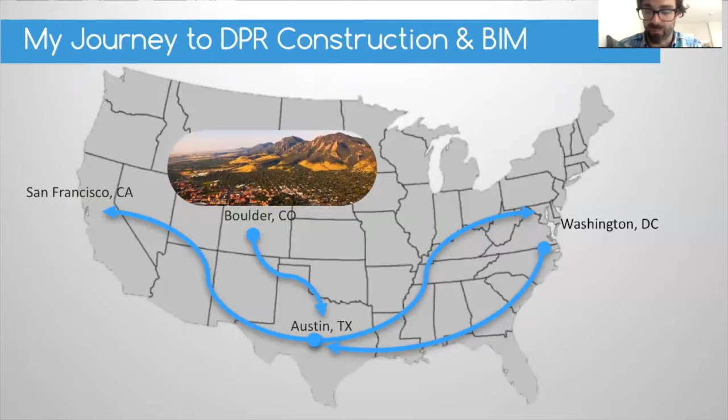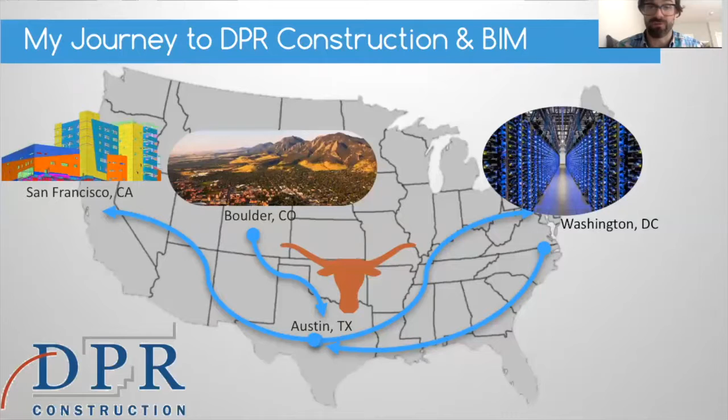I grew up in Boulder, Colorado, as you can see here, right up against the Rocky Mountains, very beautiful home, and went down to Austin, Texas, where the University of Texas is, and studied civil engineering, got my engineering bachelor's degree, and went to work for DPR first as an intern, doing data center construction in the Washington, D.C. area, and then eventually ended up full-time in San Francisco, California, working in BIM and project engineering and integrated project delivery for two different projects for Sutter Health that we're going to be talking about quite a bit today.

After that point, though, I was able to join DPR's innovation team and got some very interesting opportunity to spend time researching BIM in Abu Dhabi and in the Middle East and Qatar, and learned really from the other side of the world how contractors use BIM, sort of became a BIM trainee again, so to speak, and saw some interesting ways that they were using BIM for site logistics and quantity takeoffs and manpower tracking, and many ways that we were not using BIM in the US.

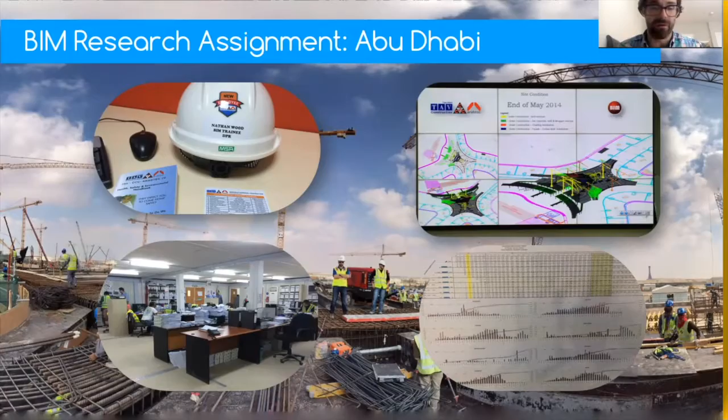But ultimately I also learned that while they were using a lot of BIM and there was a lot of really great data from BIM, there was a lot of paper, a lot of inefficiencies, and still a lot of room for improvement even out there as well. I took those experiences and was able to share those with another large contractor in Denmark through DPR's consulting group. It was very interesting to see how they approach Lean and collaboration and integrated BIM and 5D. And so I learned a lot from that experience, I think on both sides of the aisle.

And then last year, I left DPR and started Spectrum AEC, which is really intended to focus on understanding that choosing technology is just one aspect of really the innovation process, and that it starts first by understanding the needs of the people, the needs of the project team, how to define really good lean process through that, and then choosing the best fit technology. And that's really what brings me to the lesson and the story that I want to deliver to you about my BIM implementation journey. And really everybody's BIM implementation journey will be a little bit different.

I think it's very easy to start with, what is BIM? And in the US, I prefer the US National BIM Standard definition. You can see here from 2007. It says, a digital representation of physical and functional characteristics of a facility. A BIM is a shared knowledge resource for information about a facility, forming a reliable basis for decisions during its life cycle. So really emphasizing that it's a shared knowledge resource and that it should be a reliable basis for making decisions on the project.

Now, often we really want to jump into, okay, how do we do BIM? What are the 3D coordination steps? How do we do 4D scheduling? How do we do 5D cost estimating? How do we do 6D for facilities management, or the XD, which could be into energy modeling or other systems that are really pushing the limits of technology. But I think that's a lot of discussion that you'll see examples of.

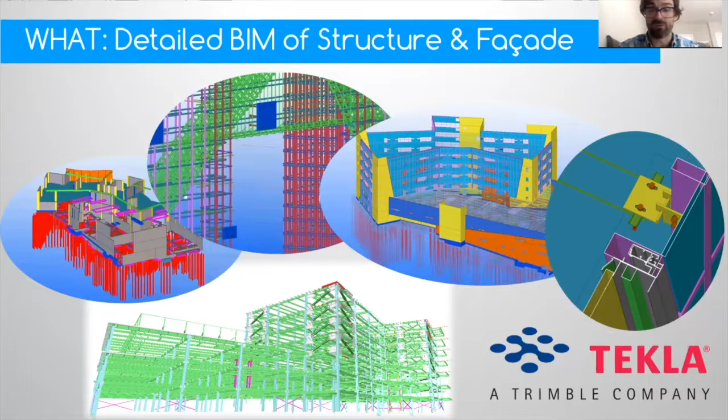And so very important, not only that these hospitals are very well built and stand up through earthquakes, but there is a very strict timeline of when they had to build that. And so what BIM was really focused on was based on those challenges of detailed structural coordination, understanding and using Tekla Structures, which is a BIM software originally developed for structural steel that now is developed around concrete works and rebar, and we were even using it for exterior skin extrusions and other facade works and some of those connections, as you can see here.

But really, how did they do it was a combination of BIM and Lean and integrated project delivery. You can see below here is the 11 different parties of the integrated form of agreement that Sutter Health signed to really bring all of the shared risk and shared reward together. And some of the goals and the key performance indicators that they had set out that was very important to their success was that they had set a need and a goal of 30% reduction in the design and construction schedule. They planned on using BIM and Lean as a way to really drive that 30% reduction.

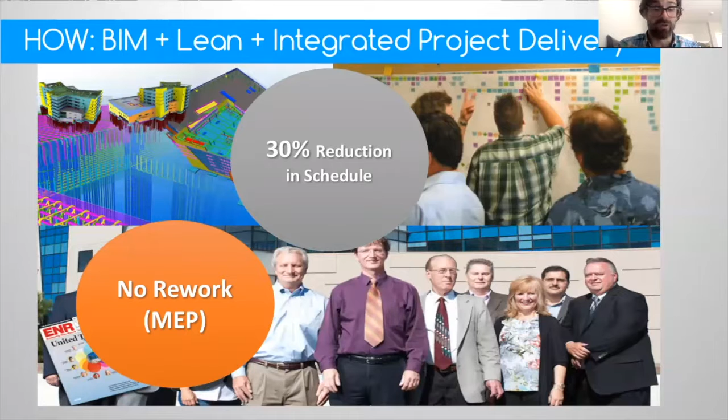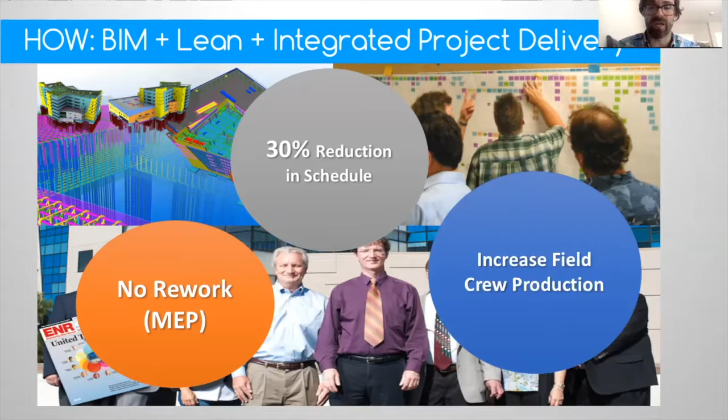They didn't want to see any rework. That was a really key part of it. And in order to not have rework in the field, that meant that we had to track the rework. And as we have less rework, I think the intent is that we should have increased field crew productivity, and we should be looking for innovations through prefabrication and modularization to increase that field crew productivity.

And really, ultimately, the vision, and you can see below, this was actually an IGLC paper in 2014 that was written by Digby Christian of Sutter Health around this 4-phase integrated project delivery that goes through the value definition, the representation, the realization, and the value capture. And BIM is really a great enabler of that, of starting with the visual representation and the needs, moving into a really coordinated, detailed BIM that is at that point of release in order to realize that BIM and capture a really well-produced facility in less time.

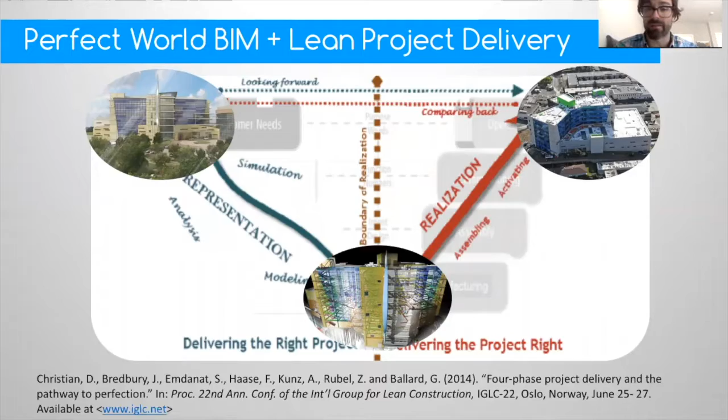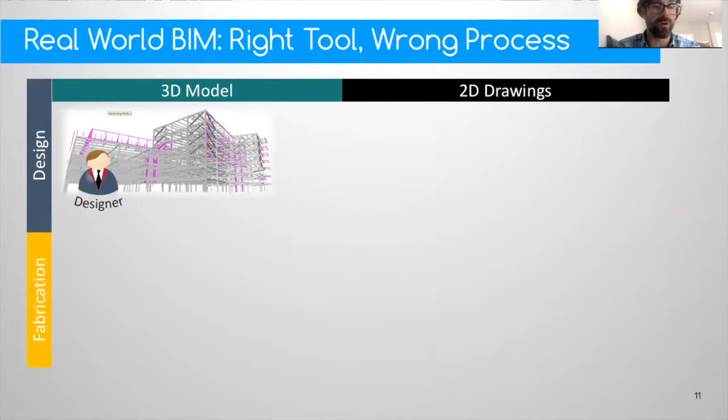But I think in reality, and what we have seen very much on a lot of these projects, and Castro Valley was included in this, is that the real world process is much more of a 3D to 2D process, and that design engineers will typically create a Revit BIM that produces a 2D set of permitted drawings for the city to review. And then the detailer will often take those and create their own separate set of shop drawings from there, in which case the designer will come in, review those drawings, and then those shop drawings are what end up going off to the contractor.

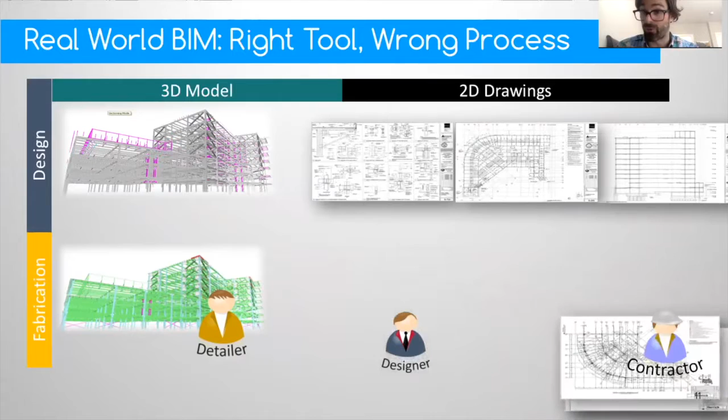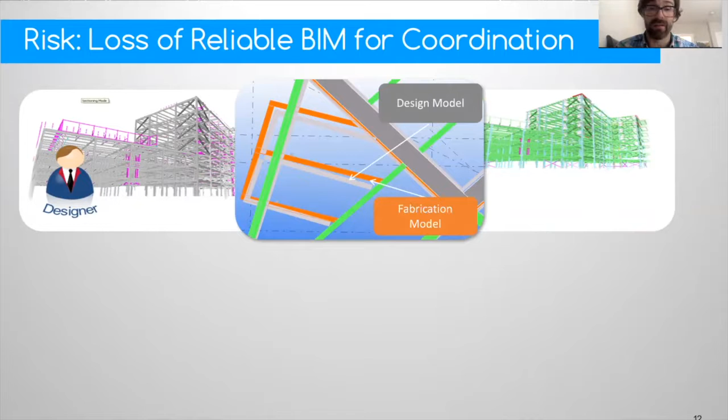So very often the question and the risk when it comes to this level of detailed BIM and wanting to not have any MEP rework or any rework was, can we be confident that the model that's created from the designer is the same as the 3D model created from the detailer? And sure enough, as we did some of those overlays and investigations, we found out that they were not aligned and that there needed to be some reconciliation between those two designs, that there was not a reliable transfer of information.

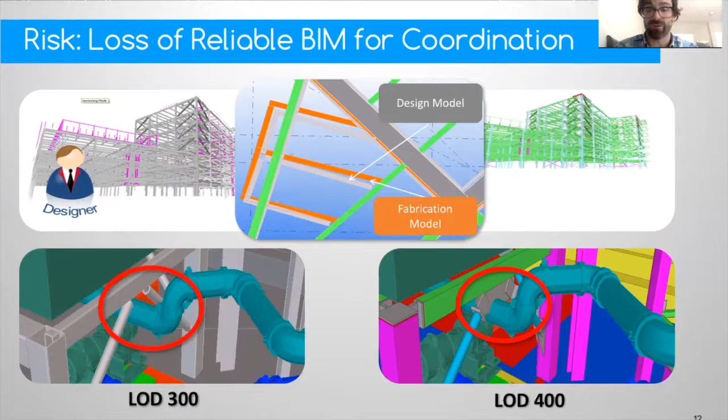You can also see that this also impacts downstream when we're dealing with amount of information, amount of detail within a level of development that is 300 versus a level of development that is 400. Seeing there that could be a very expensive $30,000 clash in the field that we want to definitely make sure that we identify ahead of time and capture that value within BIM coordination.

So one of the really great direct BIM uses is the direct transfer of 3D coordinated shop drawings or 3D coordinated models to those 2D shop drawing outputs, doing that with both rebar works and some very complex and dense rebar coordination, as well as the coordination of all of the embeds and penetrations that were required for the exterior skin system on the project.

Now, it was actually during this process of coordinating these two that we came across a clash in the model between the penetrations that were required for the precast facade system and the concrete core walls. So you can see here where the 4 or 5 different red dots there were penetrations that needed to be moved. Other areas where embeds within the concrete deck were conflicting with structural steel elements.

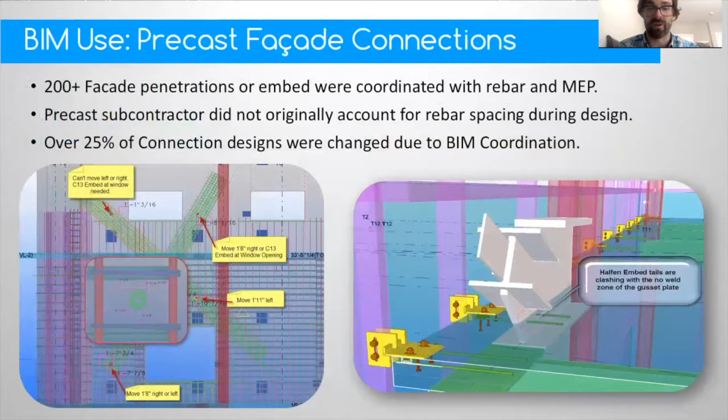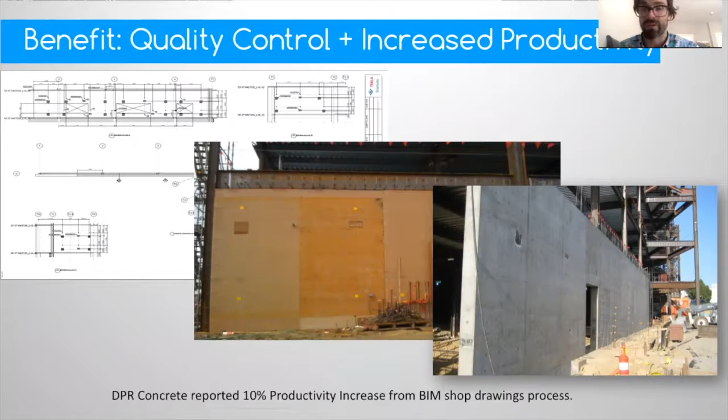So overall we found at least 50 or 60 different elements that needed to have a structural redesign and a new approval gone through OSHPD. And it was very fortunate for us to identify these ahead of time to be able to really avoid and mitigate that risk. And so you can see here, we not only gained the mitigation of the risk, but really an efficiency of direct transfer from BIM to 2D drawings to field layout, and high quality. I believe DPR Concrete reported a 10% productivity increase through this BIM to field layout process.

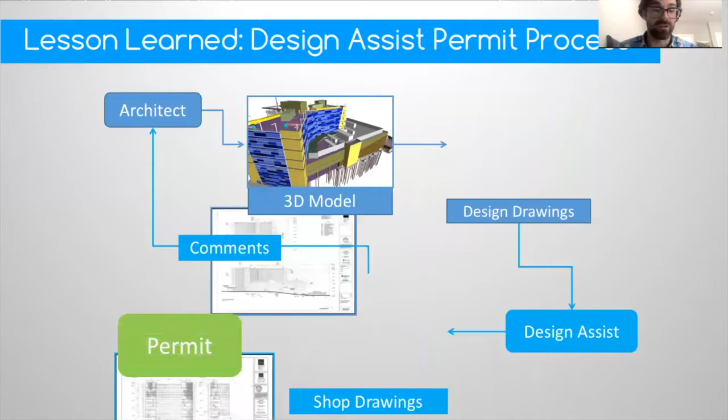So one of the lessons learned as we continue to research how the model information gets from design to construction: when it came to the facade itself, we looked at where the architect was creating their 3D model that would create 2D drawings and pass along to a design assist subcontractor that was creating the fabrication drawings. And they would create shop drawings, and we go through a comment process in the design assist process. And ultimately, we would actually have two different sets of drawings that would go in for permit to the city.

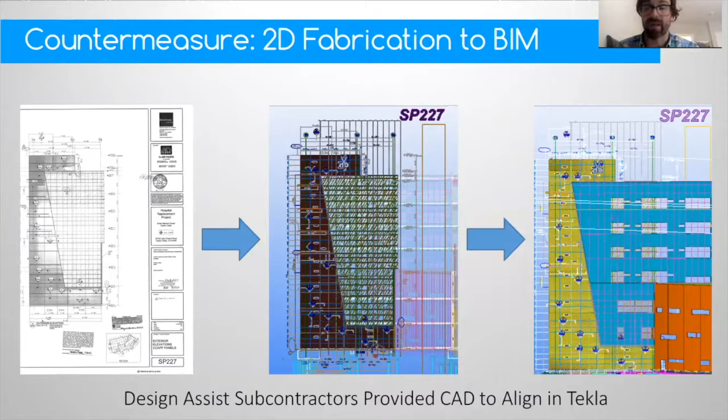Now, once again, we run into the question of, is there a reliable handoff of information in this very manual collaborative process? And what we did was we took those same shop drawings from the fabrication, moved them back into BIM, asked for the CAD drawings, aligned the CAD drawings within BIM, and then within Tekla, you can see here, we took 50 or 60 different 2D CAD elevations, aligned them appropriately on the grid lines, and virtually traced the as-built or as-will-be fabricated model of the different skin systems.

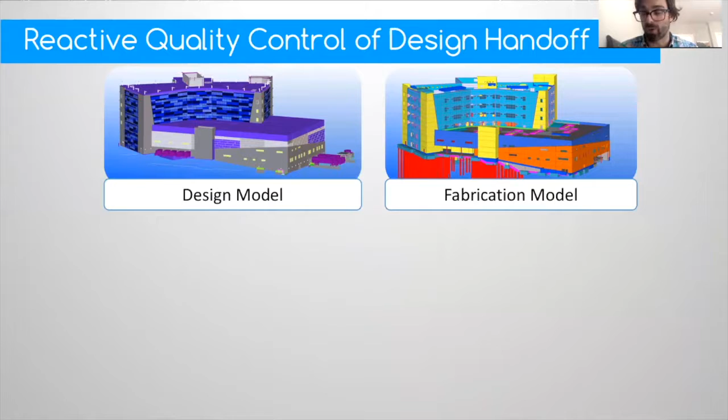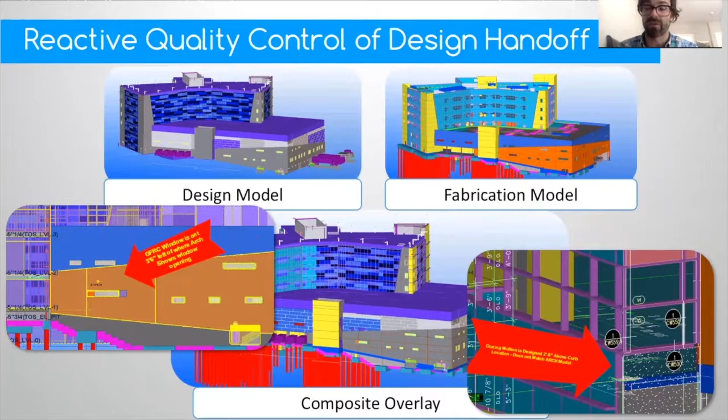And so where this becomes interesting is that now we have two drawings and two models. So by comparing the design model from the architect and the fabrication model, which is a combination of multiple trades, we can now see where there's any differences or discrepancies. And we did identify a couple of them at first. One was a simple miscommunication over a window that had to be moved for some framing that fortunately was captured before release for fabrication. Same with this, with glazing, just a height of a curb that was misunderstood and could have resulted in a lot of headaches and challenges in the field, and fortunately was identified ahead of time, and we mitigated that risk.

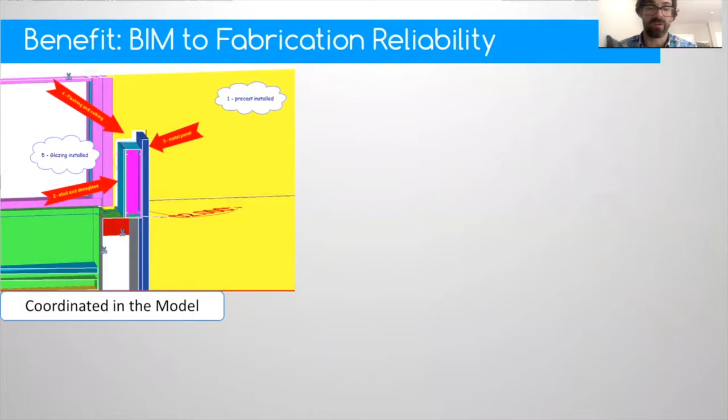Other areas had no design at all, where we saw interesting intersections of multiple trades that was basically a design gap, and we had to use BIM in order to find out how we design where this opening in the building is going to be. And using BIM, we were able to show exactly where the opening needed to be cut in the precast so that the metal panel wall could die into that.

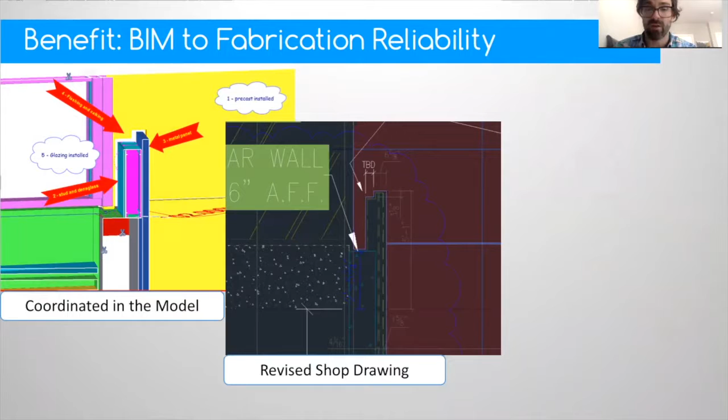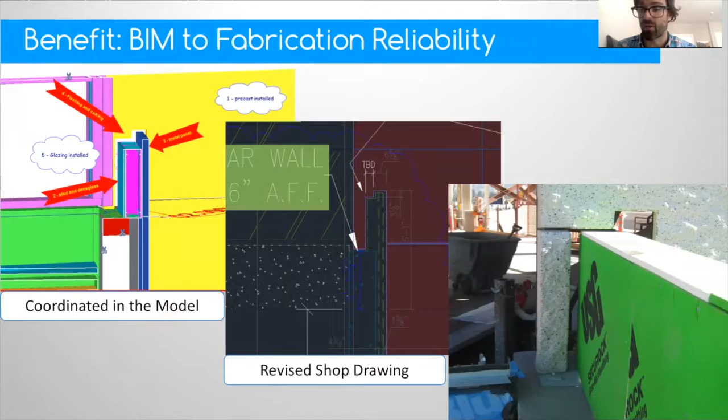And you can see that the dimensions needed for that fabrication were pulled straight from the model. They asked what those dimensions should be. We were able to provide exact dimensions through BIM, and we were able to see that updated cut, fabricated and shipped out to site, fit well, and you can see the final product there without having to do any field cuts.

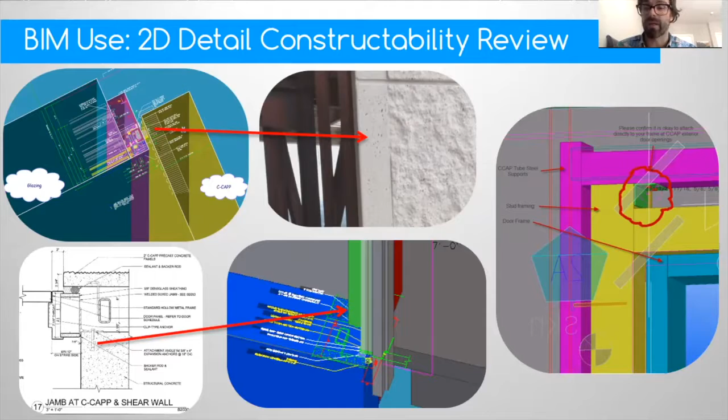So some other interesting uses for BIM on the Castro Valley project were just simple overlays of 2D details that helped us identify areas where maybe we needed to provide a flat strap for better waterproofing, or understanding the constructability of a door frame around a curb and the sequence. And even building that out further and really identifying with the field how they want to build it, and can we build it correctly in 3D and then represent those details back on the 2D drawings.

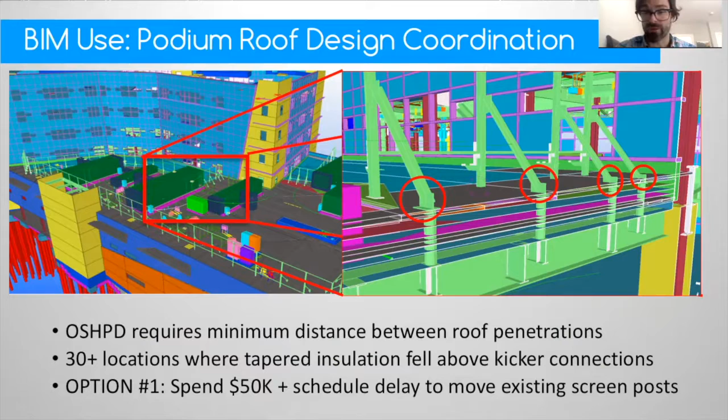Now, an interesting story, and I think the last story that I'll leave you with from the Castro Valley project, was the need for modeling of the tapered insulation of the podium roof. Now, this would not normally be something that you would model in BIM, but it was an interesting use case where we investigated to see, could we find any constructability issues? And sure enough, we found 30 plus locations where the structural steel plate for the kicker was too low, and the tapered insulation was going to be coming higher than the edge of that, and wasn't going to be a waterproofed condition.

So it was sort of a last minute rush to really bring the team together and come up with a new design for the roof that was not going to taper all the way up to the tower level, but would break in the middle.

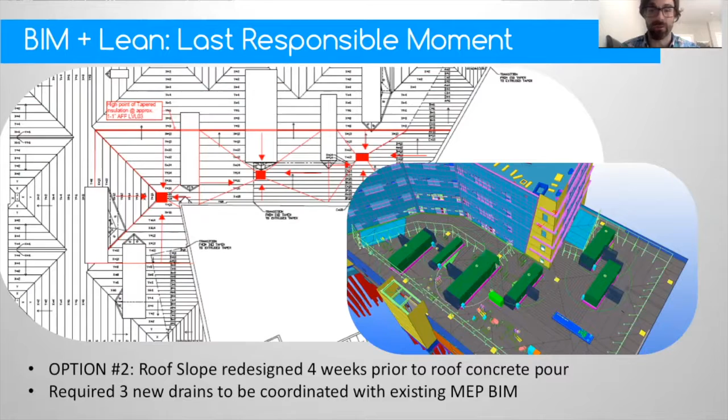And you can see there was a need for 3 new drains, and those drains would be routed to an existing storm drain riser. Now, this definitely came as a challenge for the MEP team, because they were frantically coordinating all of the massive equipment and everything on this roof. But we were able to get that redesigned and get that done.

And really how is through that shared risk and reward within the IPD team. And the fact that just because the steel and the roof were having challenges in their trades, the MEP trades that were already busy with their own work were able to go out of their way and support the team for the greater good, solve that problem, and get that concrete poured on time. So really great use of collaboration, integrated project delivery, lean, and BIM coordination.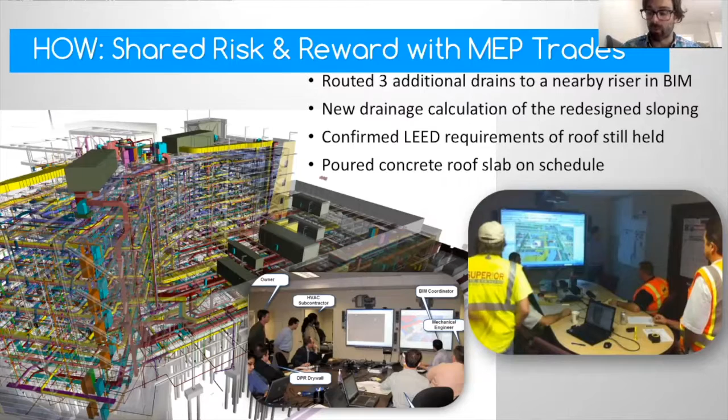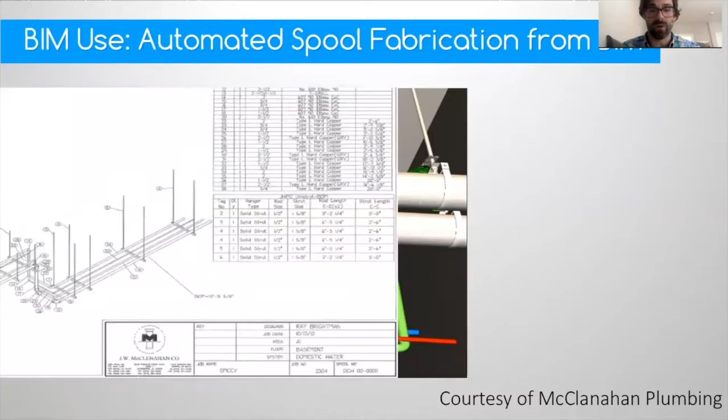Now, I actually left the Castro Valley project to go to Alta Bates, but I do want to talk quickly about really the efficiencies and the benefits that the MEP team got after I left the Castro Valley project. Now, this is an example where we can really see the plumbing detail from what they have coordinated in the model to an automated spool sheet that they have inside of their CAD systems that provide exact bill of materials and exact lengths and cuts.

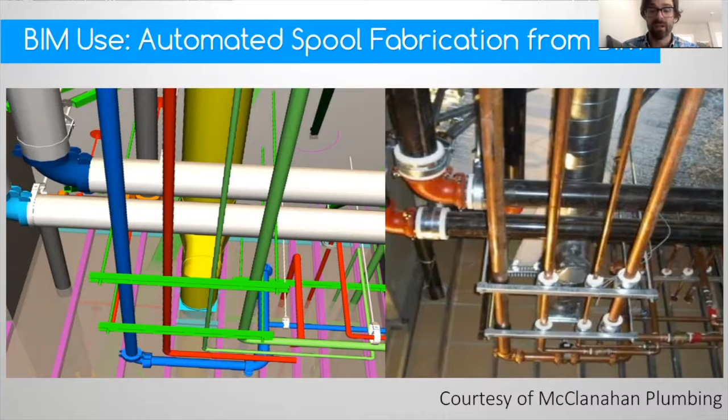They use a tagging and a kit of parts, very much a lean mentality, to have each part and piece tagged and shipped and inserted on rollers for easy access. And really that is the level of consistency, the level of reliability that we need as the general contractor in order to trust that what's in that model is equal to what's in that field.

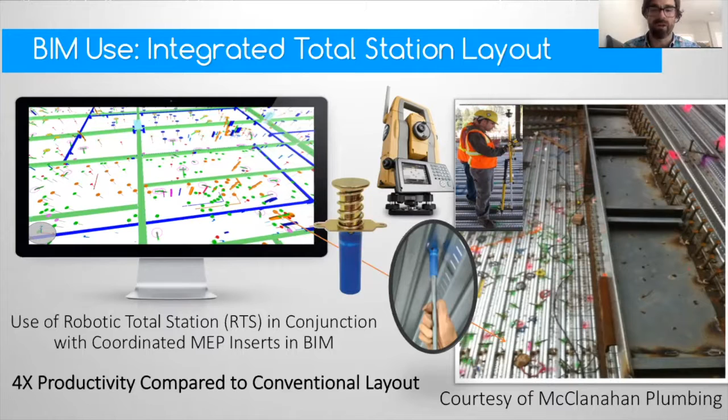Another way that the trades are able to gain that consistency and that reliability is through the use of integrated total stations. So the robotic total stations that are often used for surveying are now being used up on metal decks to coordinate the hundreds and hundreds of inserts that are required for the OSHPD compliant seismic joints. So again, this is sort of a unique challenge to the San Francisco Bay Area, but a very innovative use of integrated BIM to field using the robotic total station and showing a 4 times productivity compared to the conventional layout.

And really, because of this level of consistency and reliability from BIM to field, it now opens new opportunities for innovation and process disruption, like where DPR drywall now is using Revit and using the metal wood framer application and plugin to detail all of the light gauge framing for their drywall systems around the existing MEP openings, because they understand and they trust that that information is going to be in that exact location out in the field.

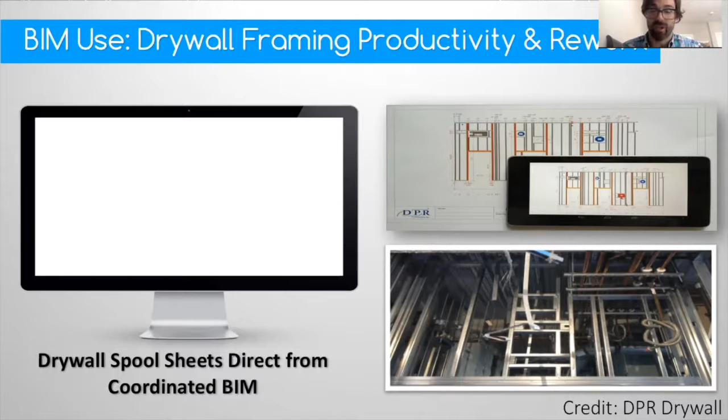And you can see that they're developing their 2D layout drawings from that information that they use on the tablet or print out on an A3 size sheet. And they're actually now able to go out and lay out openings prior to the MEP going out and laying out. It's an interesting change in process for the field that really produced some great efficiencies.

But as I had said before, in fall of 2010, I left the Castro Valley project. I was sort of asked to take some of the things that we had learned from the structure and the exterior skin systems and bring that to the sister project for Sutter Health, which was the Alta Bates Patient Tower. And again, this was a similar $300 million, 189 bed tower.

And it was intentionally delayed 1 year from the Castro Valley project in order to capture the lessons learned and really share those. So while they did share many of the same challenges and lessons learned, there were some very unique challenges to this Alta Bates project.

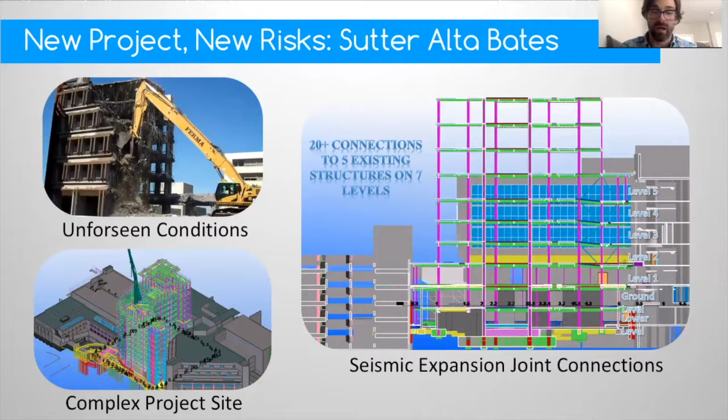So one of those challenges was the unforeseen conditions. You can see here there's a 9-story dormitory in the place of the patient tower that had to be demolished first. It was quite a complex project site, not just the geometry of the tower itself, but really the proximity to the existing hospital that needed to remain operating, and just a very, very limited site as it was in downtown Oakland.

So one of the interesting uses of BIM that we did early on in this project was modeling of temporary structures like the tower crane location and the final heights, as well as the embeds for that tower crane that were going to be embedded within one of the permanent foundations. And it really helped us understand that temporary structures do have a fairly significant impact on the final project, and that they do need to be coordinated in sequence within the project.

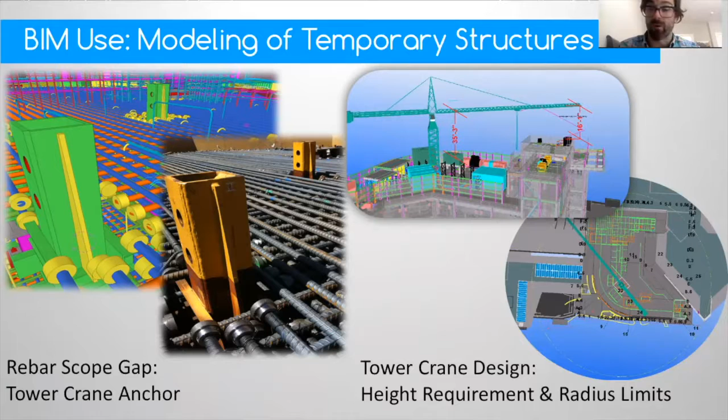And again, having that faith and trust in the BIM information for the mechanical, electrical allowed us to create those heights and use a lot of this information for even getting the crane submittal and crane permit from the city.

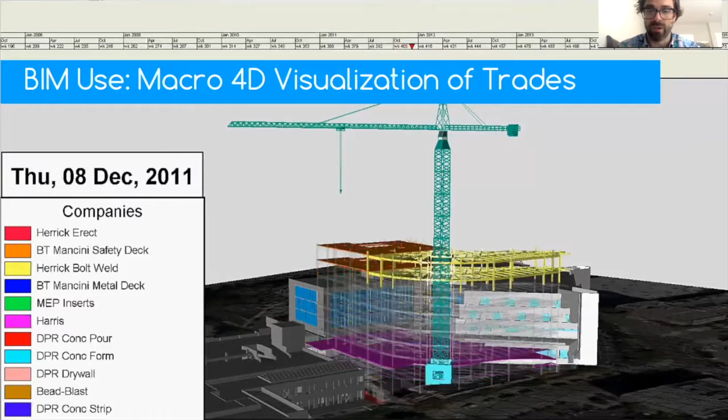On the Alta Bates project, we did some interesting exploration with the use of 4D, and this was really when the Synchro tool was really getting good traction of being able to combine a Primavera P6 schedule with the different locations and trades and zones, and to understand sort of the orchestra or the dance that goes on between different trades. And this is really a great way to visualize where different trades are going to be at different times on the project, and help look for both safety and constructability issues.

Another use that had just come out in around 2011 was Tekla BIMsight, which was trying to be a much more collaborative sort of markup and task-driven BIM collaboration tool. And we used that to communicate a lot of the challenges that we were finding in the exterior skin coordination against the existing structure. So here would be one example where there is no wall designed within the system, sort of asking, should there be a wall there?

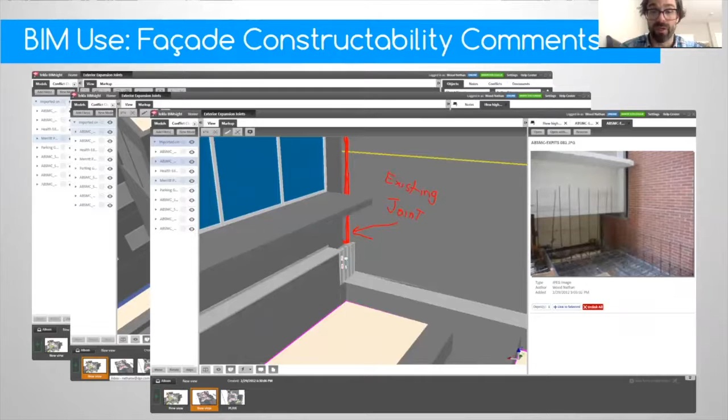Other ones where we found new conditions out on site that hadn't been documented in the existing conditions model and needed to be. So it's a great way to correlate photos and markups to ensure that we had a reliability between our as-built BIM that we were referencing and what was actually going on out on site.

When it came to DPR concrete and the innovation in layout efficiencies, really taking the shop drawing layout to the next level and understanding the pour optimization, and then utilizing the robotic total station that was being used for the MEP inserts, and now using that for concrete and anchor bolt layouts.

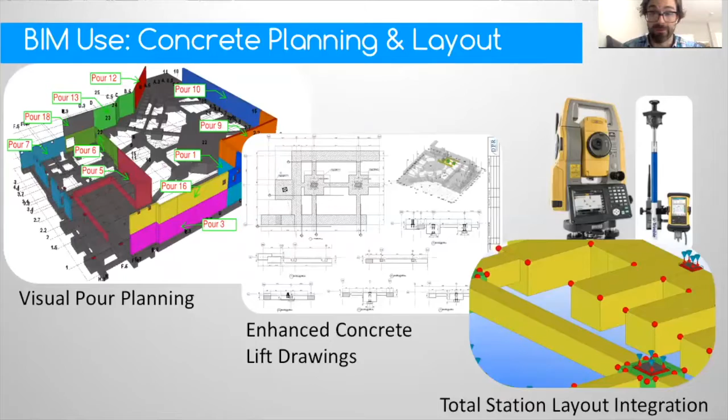But at the end of the day, I think the same challenges as Castro Valley and an increased challenge in Alta Bates was this very in-depth need to understand where the real existing conditions are compared to what BIM expects those conditions to be, because we're using so much accuracy and detail in the coordination of BIM.

So one way that we were able to gain that reliability up front was the use of both laser scanning and robotic total station. Now, it was an interesting lesson learned that there are different uses for different conditions, where laser scanning, as you can see, the red point cloud would be a much larger mesh of millions of points to understand where deviations in the face of a certain building are, or just a larger area of points.

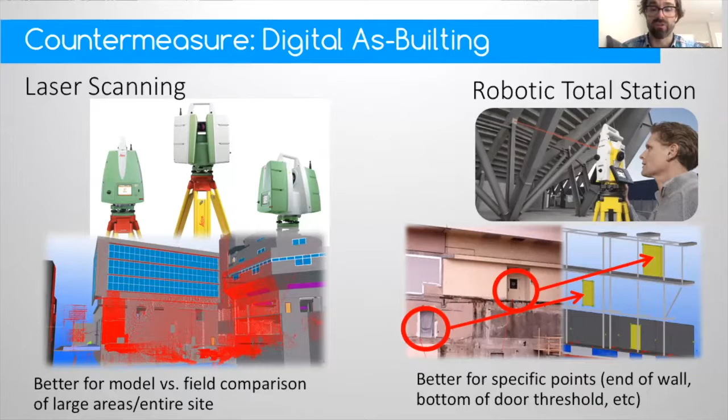If there are more exact things that we need to understand, like the door thresholds that you can see here, where we're going to be connecting in at doorways, sometimes it's actually better to have individual points from the total station to give you that really high level of accuracy and confidence.

But as we continued the mass excavation and started doing the lower foundation piles, we came into more challenges with very dense structural rebar coordination and some constructability challenges. And what had happened was that some of the piles that were drilled from the large augers you can see there were offset.

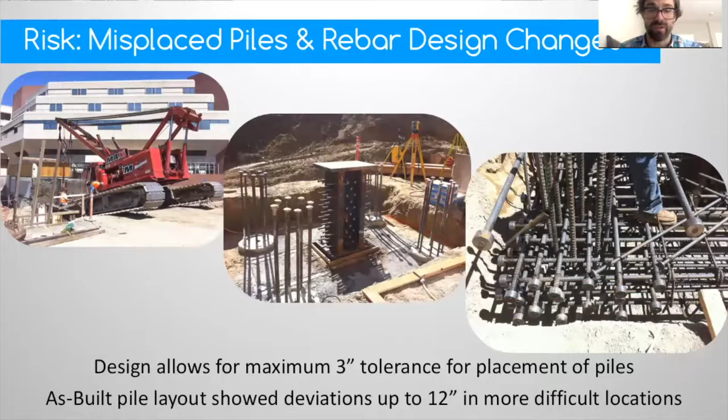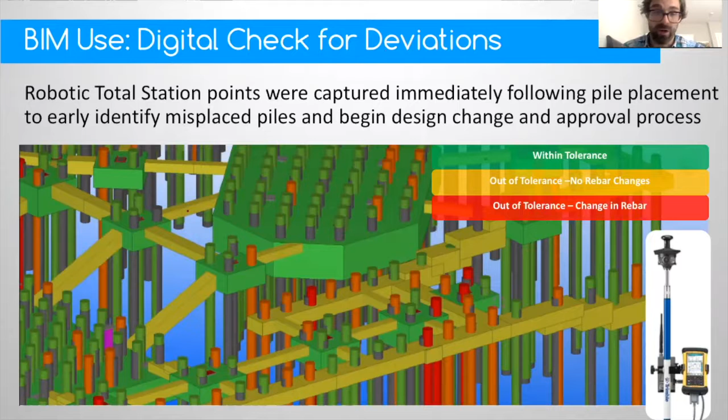And so what we did proactively was to identify and understand as early as possible when any of these piles were going to be out of place. And you can see here those that were in red required an OSHPD design change that was going to take an additional 2 weeks, or others that we had an existing fix, but we needed to order the rebar in order to make those fixes. So a great way of understanding where deviations are and addressing those design issues ahead of time.

In addition to layout deviations, we also found existing conditions that were unforeseen during mass excavation, and needed to determine a quick action plan of how to resolve those issues. One example here in the corner, we found some existing soldier piles that were not originally documented, and they were going to conflict with a pile cap that we had there, you can see in yellow. What we were able to do was identify exactly which piles were going to be interrupting the auger cast piles, which ones were only going to disrupt the foundation, and which ones we did not need to remove at all. So definitely saved some time and some headache not having to remove all of those and only removing certain ones.

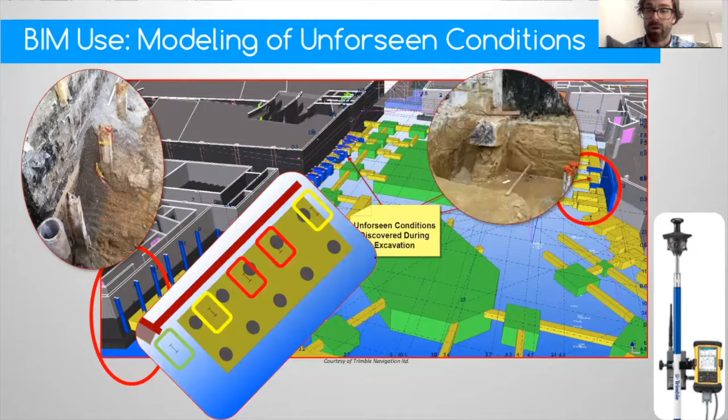On the other side here was an example of an existing bell footing that could not be removed, that was part of a structural element, and we needed to coordinate the very dense, in the US we call it number 9 rebar, that cannot be bent on site. And so the light green dots are the total station as-built points, so that we knew exactly where that concrete element was, exactly where the rebar needed to be bent. And you can see in that picture there that all that rebar was bent exactly on those angles off-site and delivered, knowing it would fit in place through the coordinated model.

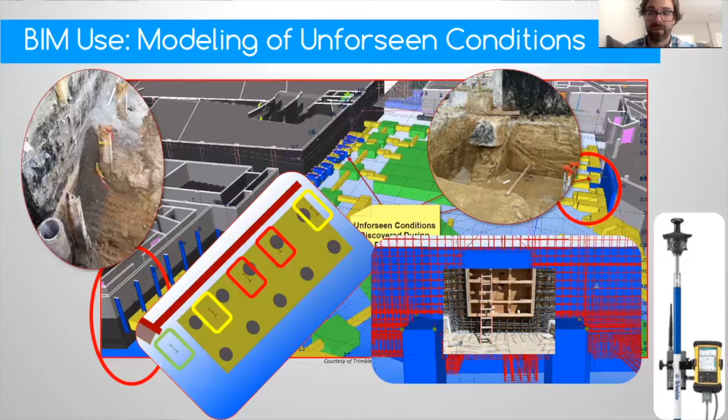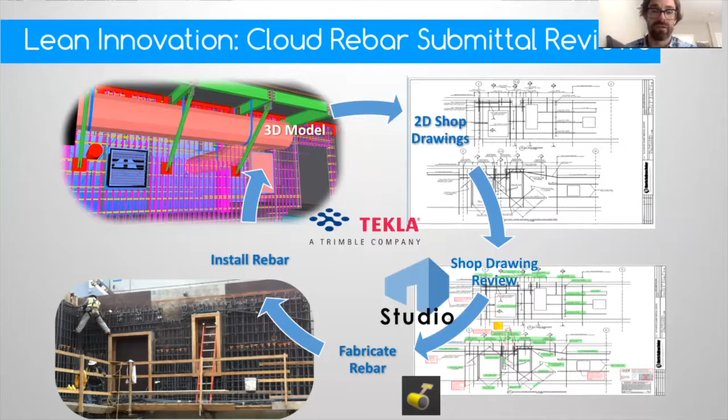But ultimately, with the OSHPD permit and the submittal approval, a lot of this does still have to go through a 2D review set. We were utilizing Bluebeam Review and Bluebeam Studio as a way to cloud review and really accelerate that 3D to 2D to review to fabrication process, creating a lean workflow from BIM to 2D to fabrication.

And one example you can see here in one of the collaborative working sessions, the value is that if a question does come up from the engineer, and you can see here there were some questions in orange trying to verify some of these bars that were included in the submittal for this package, there was a response directly from the detailer who created the drawings, clarifying exactly the answer that was needed. This really allows these drawings to be stamped as revise as noted and released for fabrication rather than the dreaded revise and resubmit, which makes it very difficult to make up schedule time.

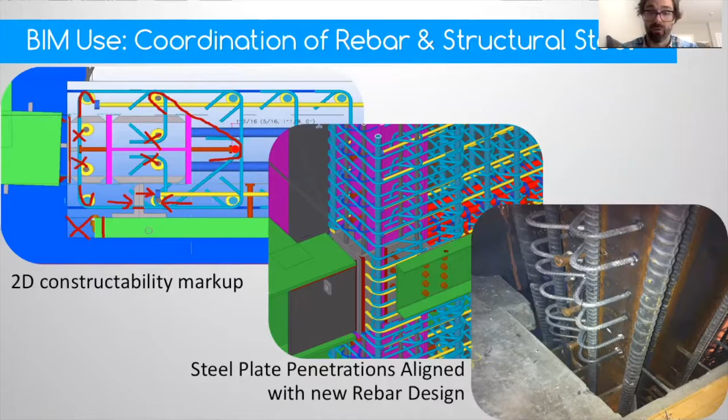Now, there were certain situations where even the 2D drawings we could not understand, because we had to go all the way into BIM to understand the coordination between the structural steel elements and some of the penetration holes where the rebar needed to string through the design. An interesting collaboration effort, again, use of IPD, shared risk and reward, and integrated BIM to combine Tekla rebar and Tekla structural steel and identify a constructible design and get that fabricated and shipped on site.

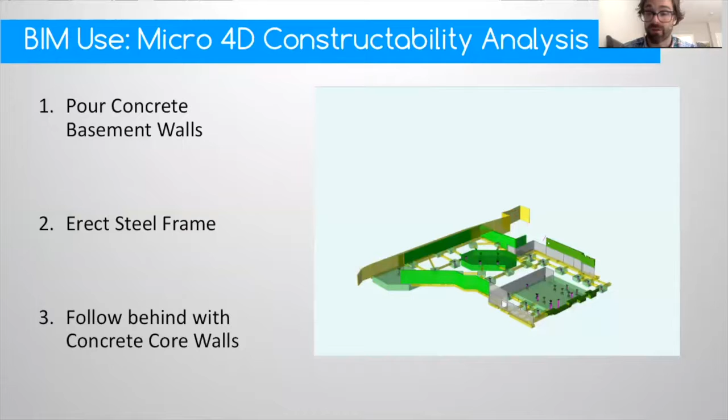Now, while we did do a lot of 4D scheduling in Synchro and testing the uses of 4D, the benefit I found most with 4D was more at a micro level of truly understanding the incremental sequences. One of the unique sequences for the structure of this building, part of the innovations to make up schedule on the construction time, was that they were going to pour the concrete walls first in the basement, then come in with the structural steel framing prior to the concrete core walls, and then the 3 concrete core walls around the elevator, the central core, and the stair core will be coming up after the steel's been erected. So a little bit of an inverse process.

And in looking at that and identifying how that was going to work inside BIM, we recognized that their sequence was going to have walls placed before columns, and the welding access was not going to be available. And thankfully, we identified this prior to that wall there being poured.

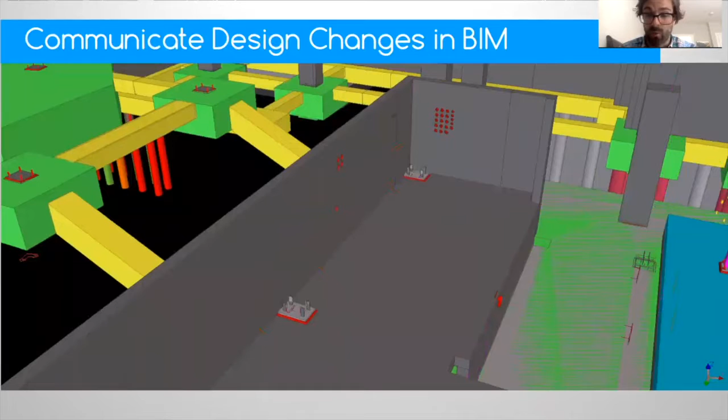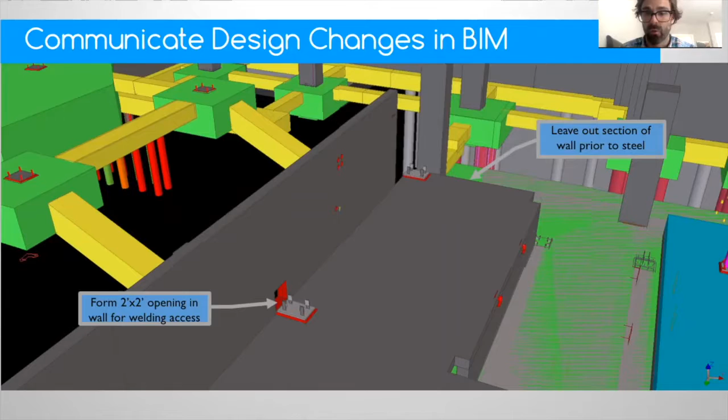So what we did was we thought up an innovation and said, well, let's open up a 2-foot by 2-foot opening and find a structural detail that is acceptable for that. And this whole area of wall on the other side, we knew that we could move where the pour joint was going to be in order to leave open access for that welding in that corner. So we picked that up later on in the elevator core.

So you can see here when that wall does pour in after the welding's been done, very easy to patch that up. We do leave the other wall open up until when the elevator core walls come in. Then we can see that section poured in.

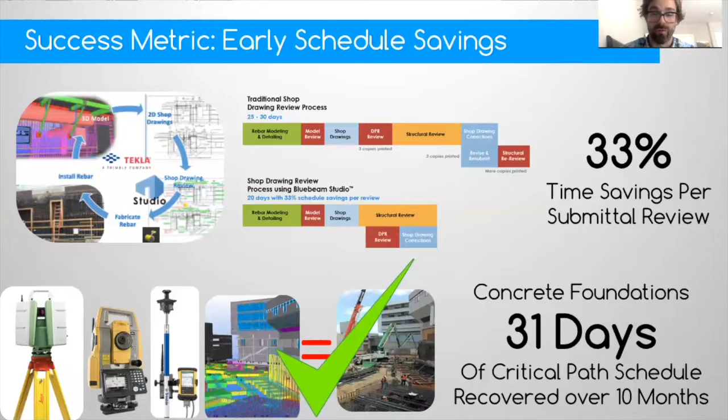And once again, just one of many innovations in lean process and integrated BIM to field with Total Station that helped this team save 33% on the submittal reviews for the rebar, which really contributed with all of those aspects to make up the 31 days of critical path schedule that was recovered over the 10 months of foundation work. So really great achievements for this project, up front.

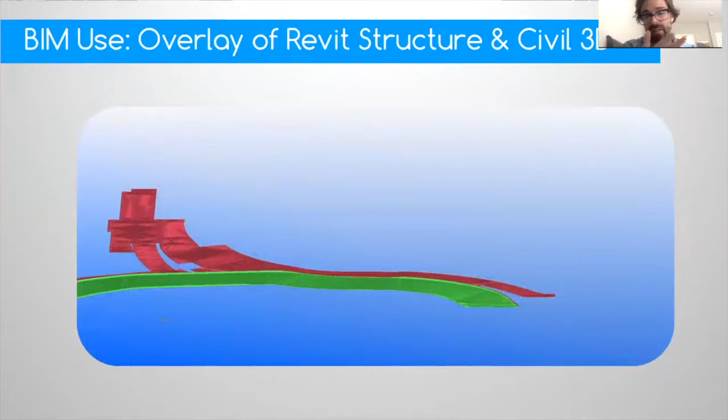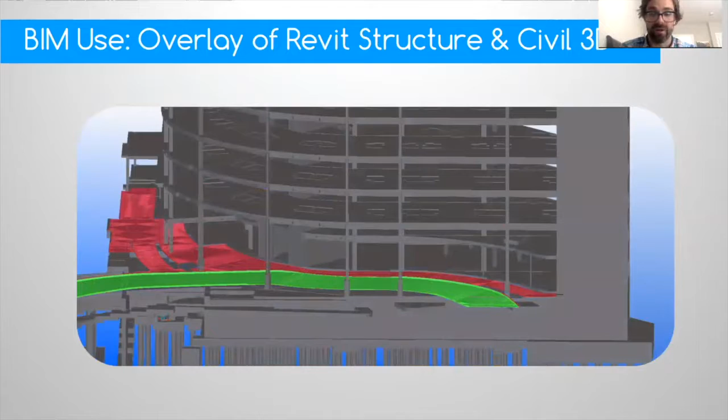You can see here the information that we were basing off of was a structural Revit model. And we had a polyline from Civil 3D from the civil engineer of what the top elevation needed to be. And we were able to align the grid lines on that and see those together in Tekla. Now, what we found was that there was quite a significant scope gap in between the top elevation of what was needed and where the structural concrete was.

And we had to basically manage weight limits and structural limits and a lot of different variables that needed to be coordinated. But within BIM, we're able to coordinate all those, get those answers, and ensure that it was constructible and met the design intent using Tekla Structures.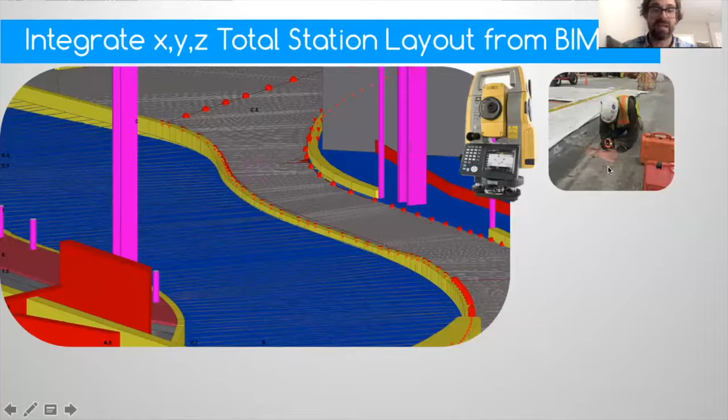And the last thing that they used was an even more detailed integration of the BIM to field using the total station. As you can see, all of the little red dots that follow along that curb that is sort of serpentine and comes up and down as you go. Now they're able to use total station to have the X, the Y, and the Z coordinate so that they could know exactly where that goes. And you can see it's a different type of receiver called a peanut prism that's used by the field in order to get the level of accuracy of X, Y, and Z. And so you can see here what that pour looks like after the fact.

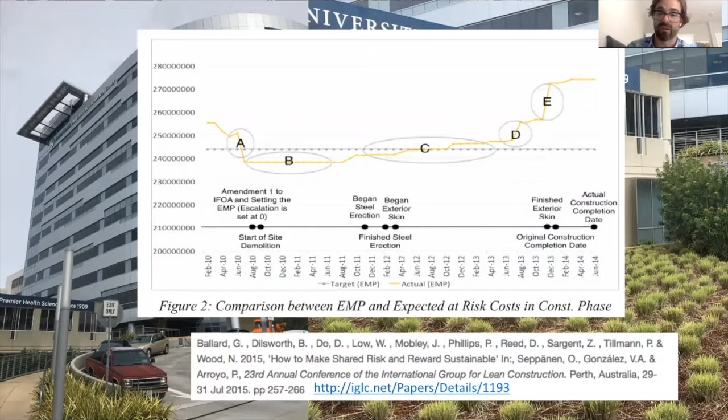And so it's now 2016 and the Alta Bates project is finished. It's a beautiful hospital. The drive aisle, I think, turned out great. But in reality, the financial and the schedule outcome were not as expected for an integrated project delivery. And there was actually an interesting IGLC paper, again by Glenn Ballard, that I helped co-author called How to Make Shared Risk and Reward Sustainable, that you can look up if you want to read more on how to avoid some of the pitfalls of this project.

But ultimately, it was an interesting question of two projects so similar, really trying to capture lessons learned, while one of them finished 6 weeks ahead of schedule and was able to maintain its target cost. And why was it that Alta Bates was delivered 6 months behind schedule and 30 million over the target cost?

I mean, I think you can see that there were certainly significant challenges on that project. But as we really ask why, if both projects did BIM, if both projects really were performing the lean process, and if they both had the IPD contract, what really was the difference? And there's a really great article that came out in 2011 around the Castro Valley project from the Engineering News Record that you can look up online.

And there's some quotes here from the team about really how important culture was in the success of this IPD project, that you should be patient and prepare for the culture change and new workflows, and to really be vigilant about communicating. And that some of these were painful adjustments, really necessary, painful adjustments that the leader, like Digby Christian, who had really ensured that he wanted everyone to know that risk and profit scenario was a critical aspect of the success of that team.

And really at the end of the day, it was the trust that they built in each other, the trust that they had in BIM that enabled them to really take it to the next level.

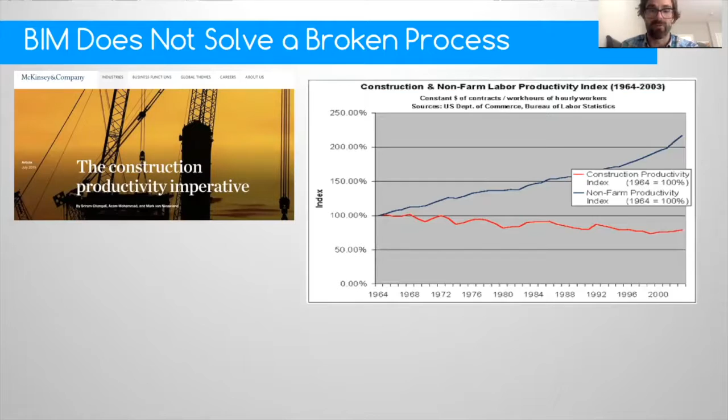But finally, and probably the most challenging, is that those people, even if they do have great skill sets, can only be as effective as that process allows them to be. And I think too often we look to BIM or we look to new technology to solve a lot of these construction productivity imperative reports and some of the productivity studies that I'm sure you guys are talking about today in the Lean conference.

I always like to look closer and deeper at the key factors and the root causes impacting that construction productivity imperative, and not seeing lack of technology or lack of BIM on there, but really around organization, communication, short-term planning, and a change in risk management.

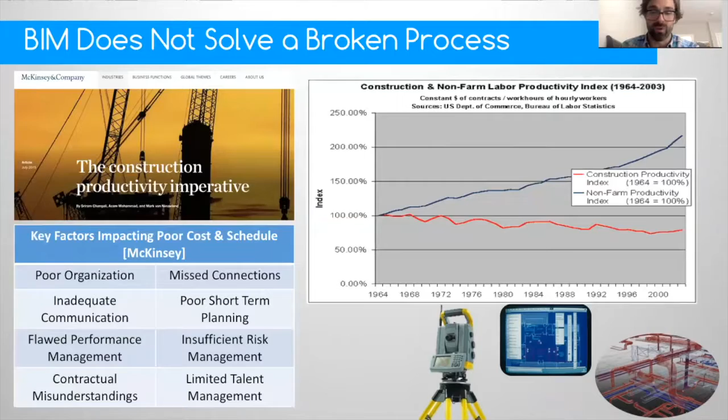And even looking at the rise of technology across the last 50 or 60 years of this lack in productivity, and realizing that the robotic total station has been around since the 70s or the 80s, that CAD and digital drawings have been around since the 80s, and even BIM has been around for going on almost 20 years now. And so these really can't be the limiting factors to adopting BIM and seeing success within it.

So we do wonder, why can't we just change that process? Why don't we just take that 3D model from the designer, pass that direct to the detailer, have that detailer come down and mark up directly within the model, and we've seen some success with in-model engineering review. And then that way we can let the detailer decide which aspects can go directly to CNC fabrication, which still needs to go to a digital 2D drawing, really driving efficiency.

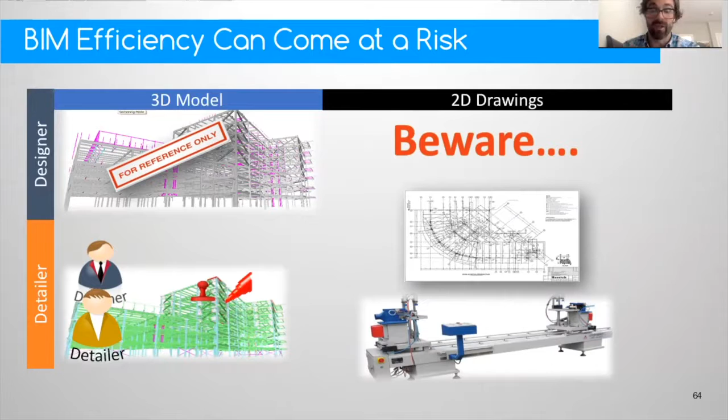However, too often we find ourselves, at least in the US, with legacy contract language that says you shall not reference, or for reference only, of my model, and liability and contracts get in the way of really efficiency and lean BIM process.

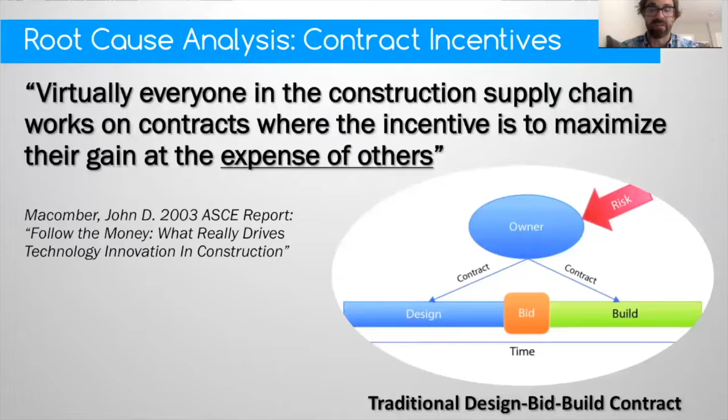And that's really why this quote is here, from John Macomber back in 2003, that especially in the traditional design-bid-build contract structure that you can see here, virtually everyone in the construction supply chain works on contracts where the incentive is to maximize their gain at the expense of others. We're trying to drive efficiency when we're also incentivized to have conflicts and be deceitful to each other. So we really need to make sure that we have the aligned incentives to drive the right process and technology forward.

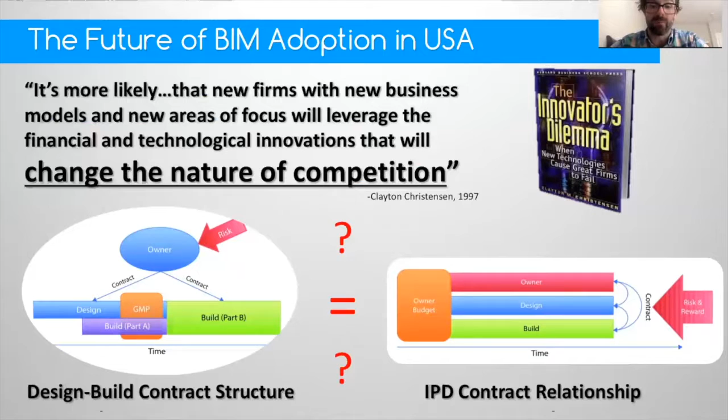And that's where I really believe that integrated project delivery, or even some of the design-build contracts that are allowing more collaboration, more sharing, more trust between designers and builders, is going to be the future driver of this sort of competition that is going to see BIM and Lean really take hold on project teams.

And for those of you who do want to dive deeper into the understandings of how contracts and process and Lean work structuring apply in the BIM world, I co-authored an IGLC paper with Lori Spittler this last year, where some of our key discussion points on how to really change and redefine work structuring at this boundary of realization between design and construction is the fact that contracts impact the feasibility of systems level thinking. And that received traditions, which is the way we've always done it, does prevent innovation within the work structuring environment.

I think some additional findings that we thought were interesting was that self-performed contractors actually take more responsibility for the project supply chain when they take on that risk, and that they see efficiencies from that. And that actually project supply chain should be restructured to reduce the variability of information released for construction.

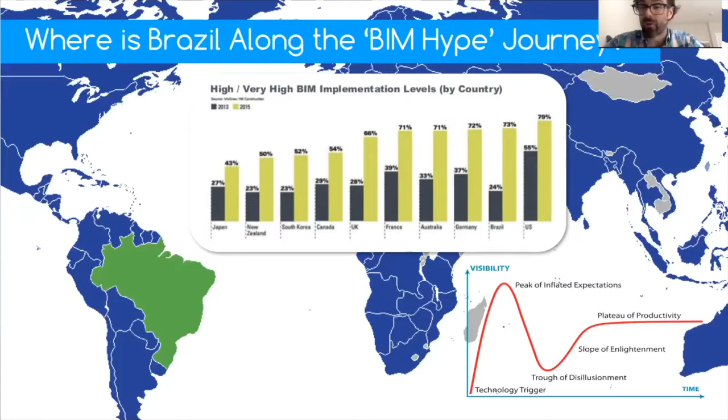I think it's interesting if we look at this survey graph here from McGraw-Hill, that from 2013 to 2015 there was a huge spike in the implementation level quoted in Brazil. In fact, the largest overall spike of any country, and really the second largest overall by 2015 compared to the US. So I haven't been to Brazil. I can't say. I think that the US number is probably a little bit exaggerated if you were to ask me, but it'll be interesting to see, what is the reality today? What do you guys think in the room as you discuss this later today? Are these numbers correct? Are they not? And why or why not?

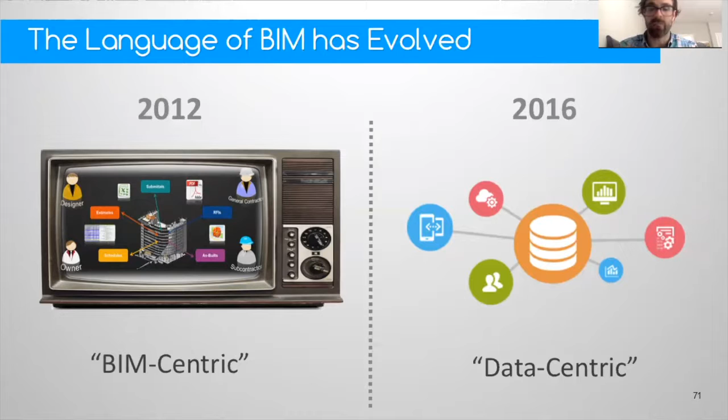And one thing that I think is very unique about Brazil's opportunity, or your opportunity now just getting into BIM, is that BIM today is a very different language than it was when I was implementing on-site in 2012, where we did have a notion that every piece of information would actually be inside of the BIM. And I think today we recognize that it's more about tagging and understanding references and how to have more of a data-centric approach to the project information.

And as we look at the landscape of all the different types of information, not just building information modeling, but project data and safety statistics or scheduling information or your task or issue list, any media, any photos or drone scans or other items. And then, of course, the classic collaboration comments that we see on drawings using Bluebeam or other tools. These tools aren't going to go away, and we need to have a common data language that will allow all these different platforms to talk to each other.

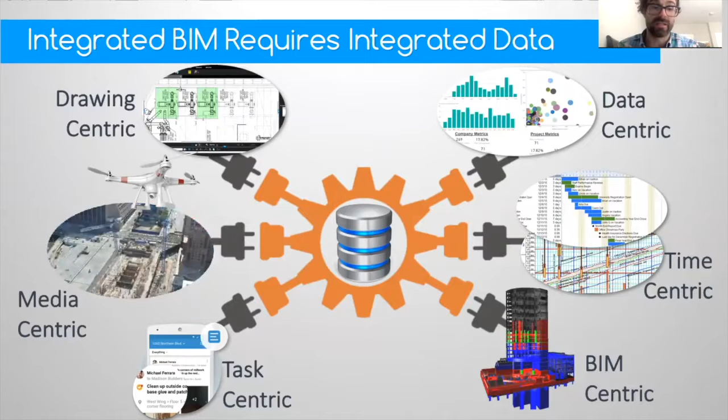It's really no longer BIM in the center. BIM is just one spoke in that wheel of the integrated data workflow. So we talk a lot, and really my focus is how do we adopt all of this BIM? How do we get much more broad-based and value-added adoption of BIM? And I think the reality is that integrated BIM and data is probably a little bit further away, or it feels further away from reality than maybe we want it to be.

And we are sort of held back by our more efficient ways to get our jobs done through Excel, through paper clipboards, or through a simple text message that may be digital, but it's not integrated and it's not connected. And so really my hope and my vision for how to bridge that gap is to say, for those who aren't ready for BIM, it doesn't have to be BIM, but let's at least get it to be digital.

And there's some great iPad and other mobile apps, again, PlanGrid, Field Lens, Bluebeam, a ton of tools out there that can integrate and can allow the photo capture and location tagging and information tagging and hyperlinks and date stamps, so that all this really great information is not just left on a piece of paper, it's stored within that database, within the iPad.

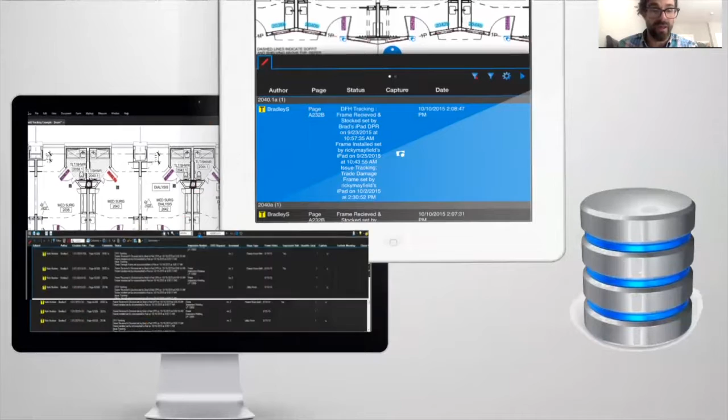And we can now take all this location and sheet information and profile information, we can load that back into the desktop and show it there. And then that's where we're going to link that back into that database. And we're really going to see that integrated BIM because it's come through that database first.

And there was a great quote within there as well from Peter Bjork, who's vice president at Skanska in Sweden, that says, our business is really all about people. You can have equipment and financial resources, but to truly succeed in a business like ours, you need to have the right people in the right places. And so another great lean term is to plan the work and to work the plan.

And through Spectrum, we've been trying to do a lot more of these assess, align, advance, or A3 workshops, where you do want to start by understanding and assessing where is the current state, where is BIM being used, why does that team really care to use BIM, and how are we going to define that value? And then bringing that team together to really align, okay, within that current process, what are the best tools, what are the best uses of BIM that are going to fit within our current design process?

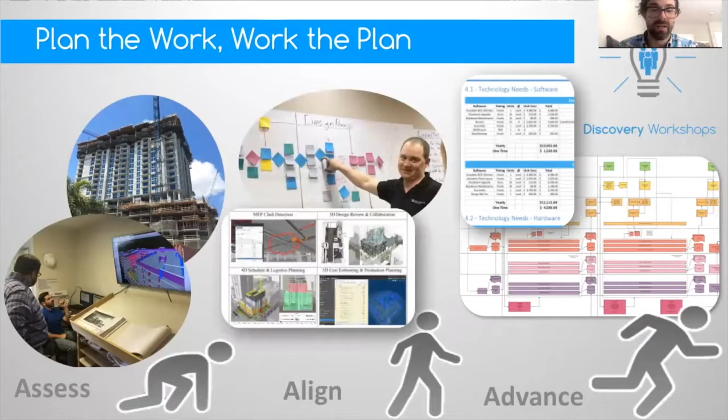And then really align ourselves together on what that plan is, advance that forward, document what the technology needs are, begin with the end in mind, and have those key performance indicators that are going to take us to the finish line. And so, if I could leave with one message of what should you do to be successful with BIM, or what technology, unfortunately, it's not a certain technology, and it's not a certain process either, and it's not a particular type of people.

It's really a balance of all three, and we've got to have really sound BIM and data standards. We've got to have lean and digital workflows that are really allowing those who need to do their work to get their work done, but also capture the data in a very integrated and lean way. And then also make sure that the people are incentivized, and that there is shared risk and reward to want to take some of these innovation risks and see some really great BIM collaboration and lean innovation happen.